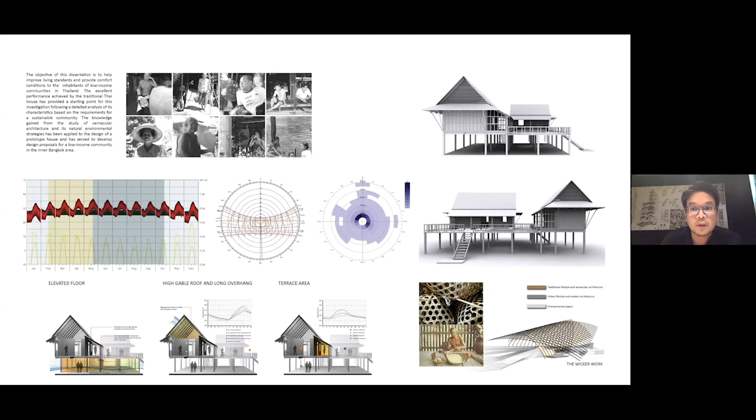So my dissertation is about the low-income community in Bangkok. And through the design process, I have learned the traditional Thai house, the climate condition of Thailand, and the suitable passive design strategies, as well as the analyzing tools, which allow us to understand our design's building performance. Essentially, I have learned the meaning of sustainable design and ways to apply this strategy to various conditions.

And after I graduated from AA in 2010, I came back to Thailand to set up my own office called Stu/D/O Architects with my friend who graduated from MIT Urban Design. And the meaning of Stu/D/O Architects came from the names of the 2 partners. And we also believe that collaboration and brainstorming, like the way we work in studio among friends and professors, will encourage our imagination to create good architecture.

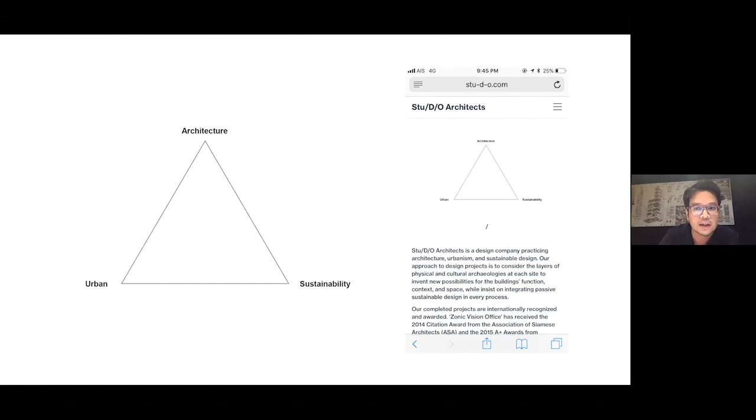And if you visit our website, you will see that our aim is to merge the idea of urban and environmental design into our architecture. And right now we have about 17 people in our team. And our office is an open plan in order to encourage teamwork and provide flexibility for the employees for the highest level of productivity.

And at that time, the idea of sustainability in Thailand was still not that widespread. A lot of people may have heard it as a buzzword, but they didn't really understand enough and weren't willing to invest in sustainable architecture. So they rarely invest in environmental consultants or in environmentally friendly materials, except for a small number of projects that are specifically aiming for the LEED certificate. So we had to absorb and manage the expense and man-hours, as there wasn't enough flexibility from the client side to compensate both the duration and professional fee of the design.

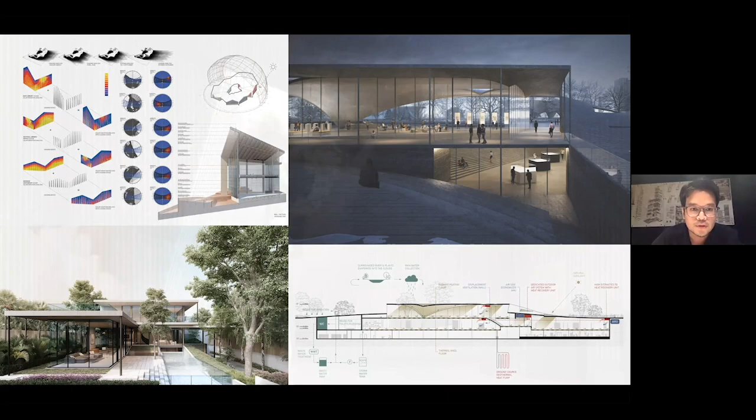And within these conditions, we try our best to propose environmental passive design strategies for every project we have done, while still maintaining both the function and aesthetic of architecture. And this became the main approach for our design that distinguishes our projects from other firms in Thailand. And our design philosophy is to use architecture as a medium to connect between people and environment, accentuating its identity through architecture and space that enhance user comfort, as well as benefiting society and environment.

So the first project I want to show you today is called Zonic Vision, which was our office's first project. It's a 2,000 square meter, 5-story office building. And by the time I was back in Thailand, the project massing and function had already been developed. So I stepped in to help with the front facade, which needs both aesthetic and thermal control as it faces west. So we proposed a double skin system with ventilation to reduce heat gain and at the same time provide aesthetic through glass with various opacity. And it also responds to the function inside and creates patterns which relate back to our concept of sound frequency.

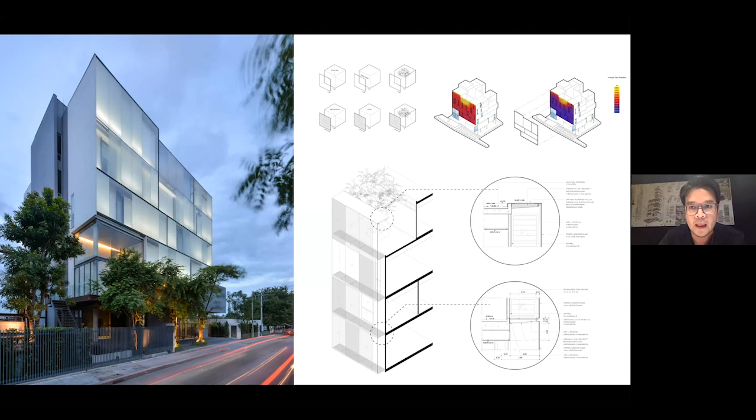So then the next project is Konapa, which means in the forest in Thai. It is a mixed-use project that reminds me of what Simos was saying, that sometimes our own feelings tell us about the environment more than the simulation itself. And during the design process, we were lucky to have known the owner of the project and were able to visit the site almost every week, which allowed us to deeply understand the site condition and environment.

And this project is located near Phrakanong BTS train station. So the foot traffic here is quite high because people normally use this street as a shortcut to the BTS. And the existing trees provide cooling shade for this street, which is usually very hard to find in Bangkok. However, the fence is in the way and prevents people from having access to this green area. So we wanted to preserve this hard to find green area in the city while making it more accessible.

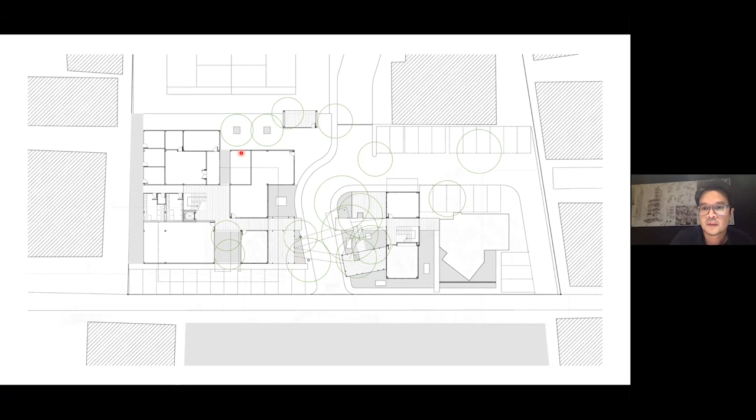So we came up with the idea to merge architecture into nature and emphasize the uniqueness of the atmosphere that nature provides. We started by surveying the existing trees in order to find the best location to place our building. As you can see, most of the existing trees are in the middle of the site. The complex is therefore divided into 2 parts, with the advice from the arborist that a higher building may block the sunlight to the pink trumpet tree here.

Building A was then designed as a horizontal building, while building B is a vertical building. And in the middle, we create a floating exhibition space that is connected to bridges, stairs, and a ramp. And as you can see, we try to open up the middle of the site, which has a lot of trees, for the main entrance.

The components of the main facade, which faces the street, create a gradient pattern from the trees in the middle toward the urban context. And because of the good microclimate condition in the site, this side of the facade is the only concern we have on solar radiation. Therefore, we have decided to make it a double skin facade with openings to help ventilate and block the direct solar radiation for the interior space.

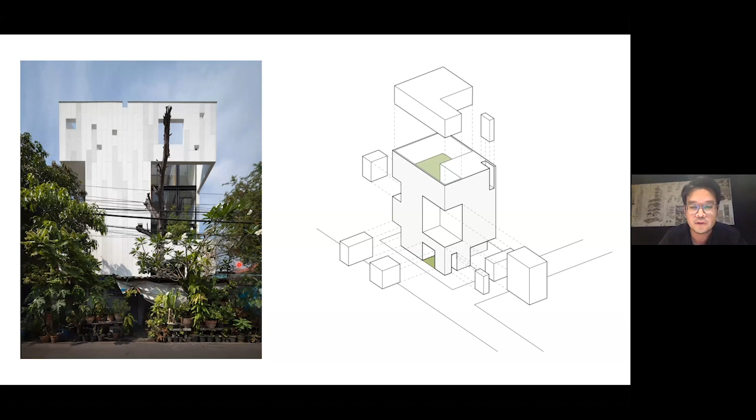We then subtract certain parts of the massing in order to create internal green areas. And our strategy in puncturing the openings can be categorized into two ideas. The bigger openings are used to frame the view, while the smaller ones help with ventilation. Other details such as tapering the edge will help with privacy and create interesting light and shadow inside the house.

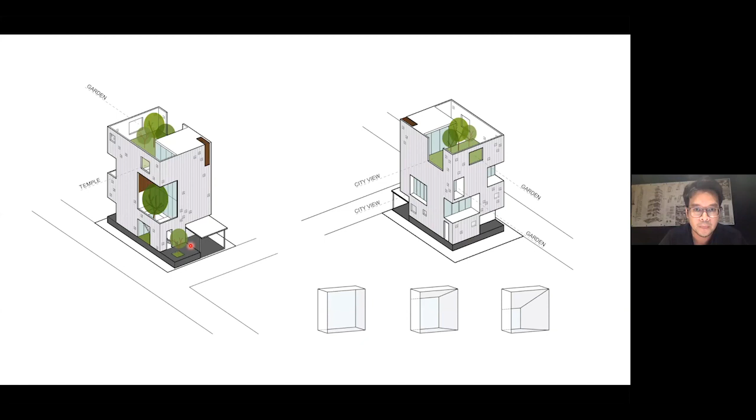And the exterior wall consists of two concrete layers with insulation in the middle to help reduce the heat. We also use wood louvers which can be opened and closed wherever necessary in order to help block the sun and make the house feel homier with the warmer tone from the wood. And this tapered detail of the opening would help with privacy from the surroundings as well.

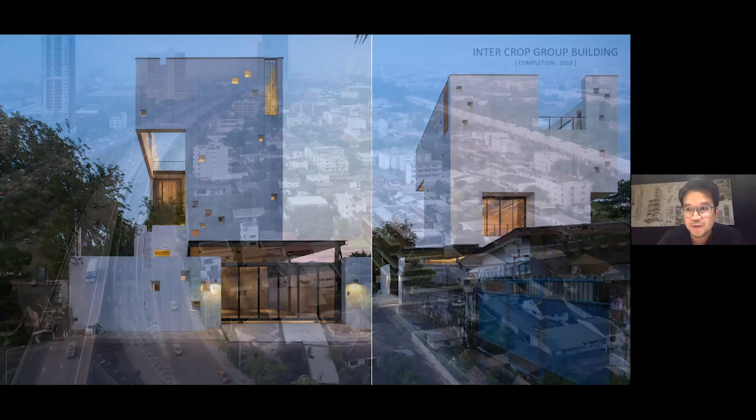And the last project I want to present today is the office building. The project began when we were approached to design the new headquarters for an agrochemical company by the name of Intercrop. And as the company name suggests, Intercrop's main focus is on the development and production of agriculture-related products.

So we wanted to rethink what a modern office building in the city can look like and how we can not only bring this modern trend into a traditional office setting, but also bring the feeling of working on the ground and in nature to our vertical building typology. So for us, using the rice terrace as an inspiration represents a way to reintroduce the traditional relationship between human work and nature, where all elements positively affect one another, into modern offices.

Ultimately, our goal is to design an office building that represents Intercrop and its relationship with Thailand's agriculture, as well as create architectural space that has a positive impact on its occupants and the surrounding environment. And because this project is located in a rapid urban development area, it became one of the first mid-rise buildings among the existing residential homes. And this condition led us to set up a challenge of how do we design a 5,000 square meter office building that is suitable to the surrounding context.

One of our design solutions is to reduce the scale and perception of the building's physical massing through the shifting of individual form masses, which reflects back to our rice terrace concept. And through the integration of as much greenery as possible back into the architecture, we were able to contribute more green area back into the city, which reduces the impact of the urban heat island.

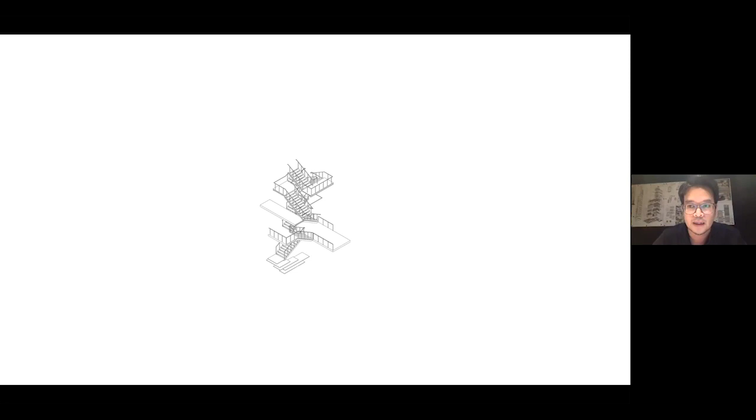And the formal interpretation of the rice terrace is also reflected in the interior space through the shifting platforms and orientation of each function, with the main staircase connecting them. And we propose these public functions as spaces that would encourage the office workers to be involved in a variety of activities and relaxation, such as fitness, cafeteria, yoga, and so on, which are all connected to the green terrace.

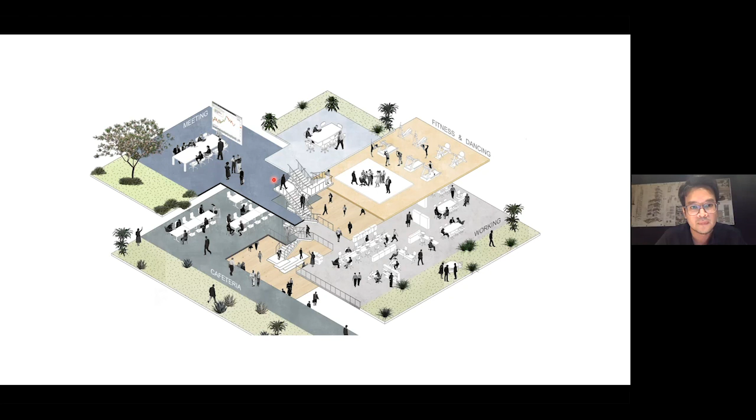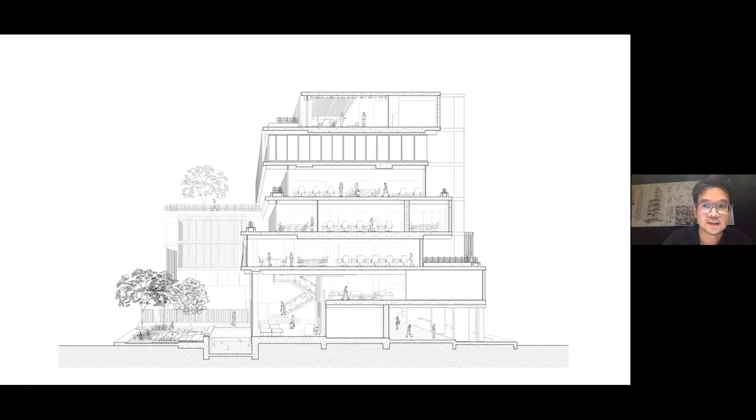And we try to integrate passive design strategies in order to create comfortable working space through the consideration of natural ventilation and adequate daylighting. Okay. And we also use a layer of green roof to act as insulation, and analyze solar radiation in order to design shading devices for each orientation, which were designed to reduce heat without compromising the outward visual connection.

We're using a tapered design for the louvers and reduce the thickness of the lower part of each louver to correspond with the occupants' line of sight. And the overall thickness of the louver also corresponds to the orientation it faces. The awning and upper louvers of the north facade protect against high angle sunlight, while the thick louvers are utilized in the south and east facades.

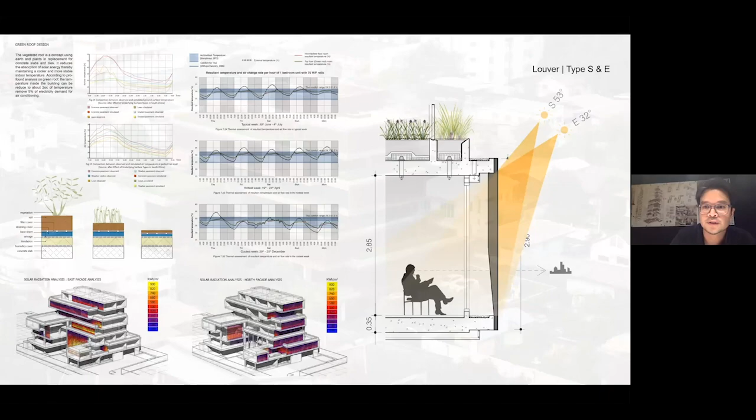And we were lucky enough to be awarded ever since our very first project, both locally and internationally. In our country, we received an award from the Association of Siamese Architects, which is the highest prize here in Thailand. And internationally, we have received the award from Architizer and ARCASIA. And also we have been chosen to compete in the World Architecture Festival in 2017 and 2018, which has taught us a lot in terms of presenting against world-class architects.

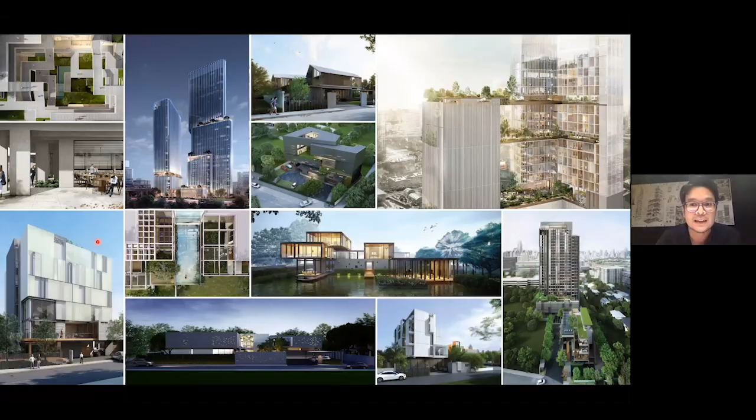And these are my 10 years experience after I graduated from SED. Finally, I would like to say that I'm very honored and proud to have learned from Simos and other professors, as well as meeting all my classmates. It was a great experience, and the knowledge I have learned from SED is an important part of my career and my success. I'm hoping that in the future, I will be able to create my own sustainable department in my office and integrate more profound understanding about sustainability into my architecture. And thank you.

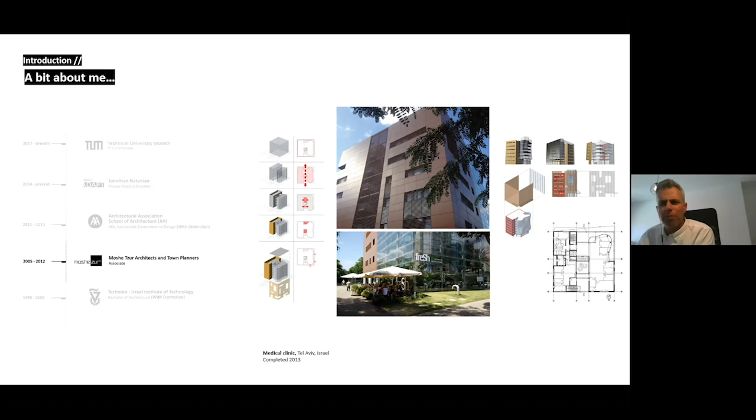The first one was a medical clinic, and the second one was an office tower. Although some environmental ideas were implemented in both, I already knew that I wanted to intensify my knowledge on environmental design, and getting the okay and the bursary from Simos and the staff helped my decision to move to London with my wife and one child at that time.

Looking back, I can say that the intense SED program converted the way I was, and still am, looking at buildings and sensing them. I really admire the triangle of knowledge between empirical measurements, simulations, predictions, and theoretical knowledge. This is something meaningful that I took with me and I'm implementing in a way.

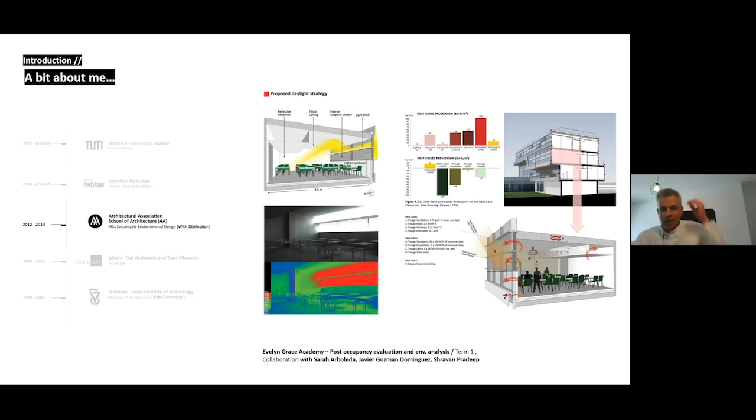Here we see a study my group did on the Evelyn Grace Academy by Zaha, which got a BREEAM outstanding, but revealed very surprising findings. Actually, SHRAVAN, the next speaker, was an important partner here.

This was our second project, in which we explored the interaction between environmental design principles and spatial expression in a colleague community in Brixton.

In my thesis, I came back to the office building typology in Tel Aviv, which I had worked on previously in practice, and developed an environmental design strategy for the adaptation of that typology to the local climate. Actually, this project raises a lot of interest now with the pandemic. So the idea that we can think differently about an office building, other than the default setting of the fully glazed office box, is something very relevant, I would say—still, fortunately and unfortunately.

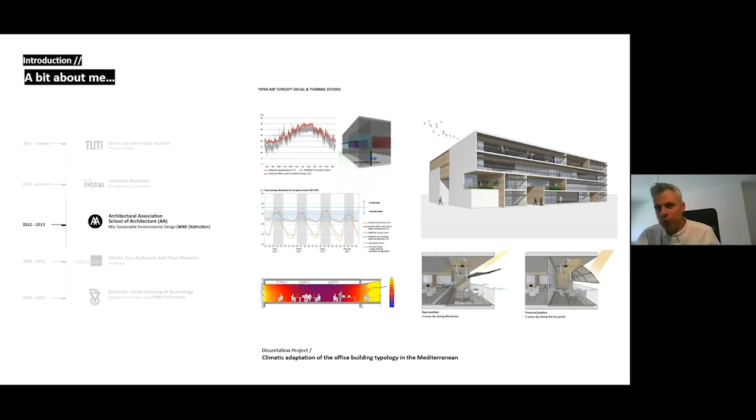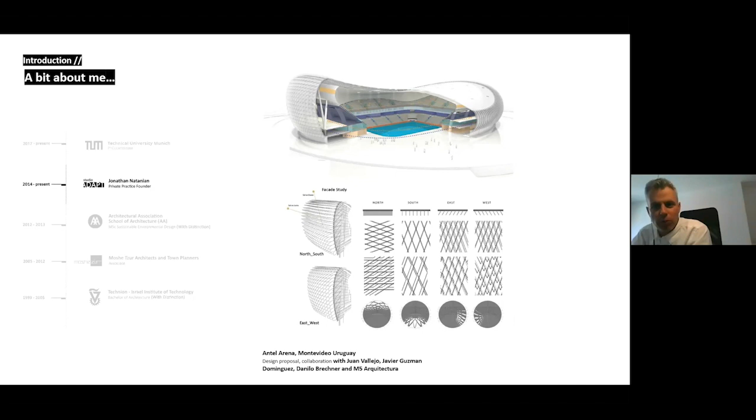Post-graduation, I came immediately to Israel and founded Studio Adapt, which is a sort of hub under which I led research, taught, designed, and consulted, both abroad and in some projects also in Tel Aviv.

At that time, I led research for the Israeli Ministry of Environmental Protection. I won a grant to adapt the whole theme of zero energy buildings to the Israeli context. While doing that, I realized how limited the valuable knowledge is on the correlation between urban and building morphology and environmental performance in our context, but not just there. That sparked the idea to do a PhD.

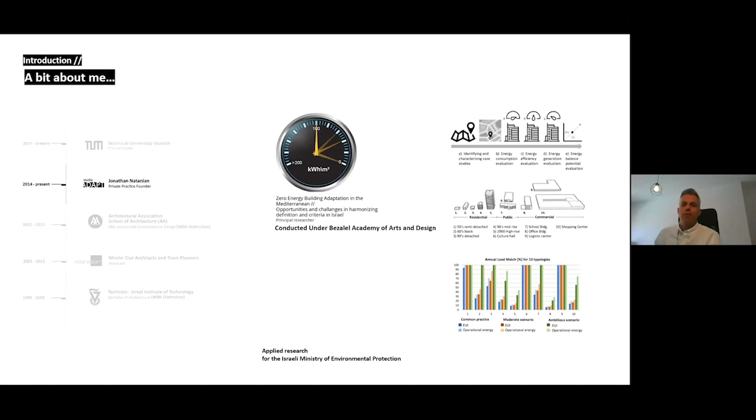After winning the full scholarship from the DAAD, we moved to Munich in 2017, now with two kids—they are now 5 and 10, two boys—to explore new workflows to indicate the spatial environmental trade-offs of densifying urban blocks in hot climates.

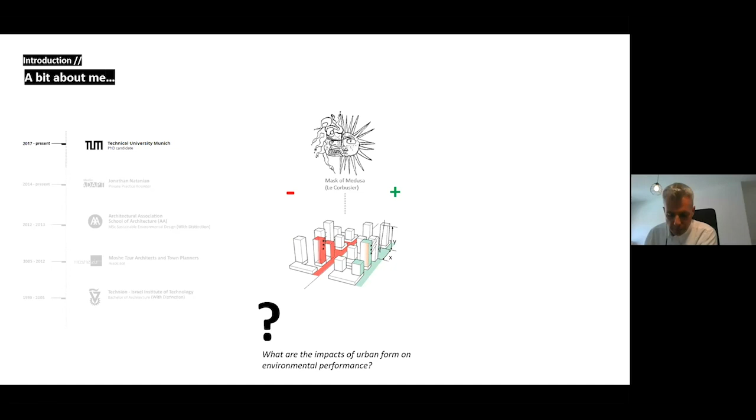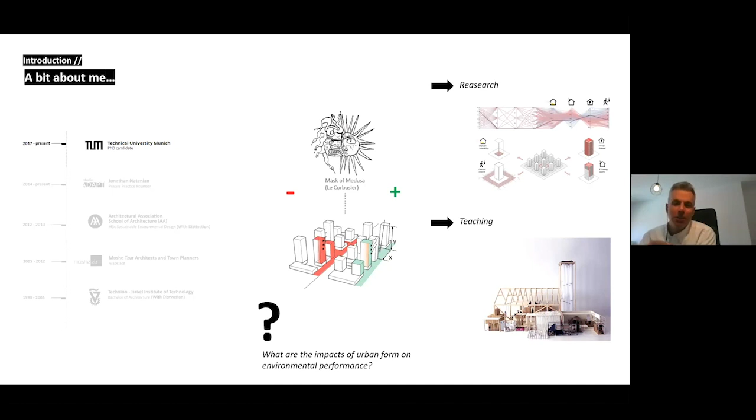During my four years at the Technical University of Munich, TUM, I was mainly focused on research and teaching, so it was very far from practice. But I must say I really loved doing that, and it led me to the tenure track position that I'm going to start in September in Israel.

In my work, I am exploring an integration that I claim is not yet very well established between architectural thinking, which is preoccupied with these sort of questions, and environmental engineering, which looks at the built environment from a different perspective. A gap still exists despite recent developments in design platforms, BIM, etc.

When we translate them into quantitative discussion, on the environmental side we're witnessing initiatives towards zero emissions and zero energy. On the urban side, the paradox of the compact city is still relevant: on the one hand, the advantages in terms of infrastructure reduction, lower envelope area, walkability, social connectivity; versus the disadvantages, urban heat island, reduced access to light and air, social segregation, etc.

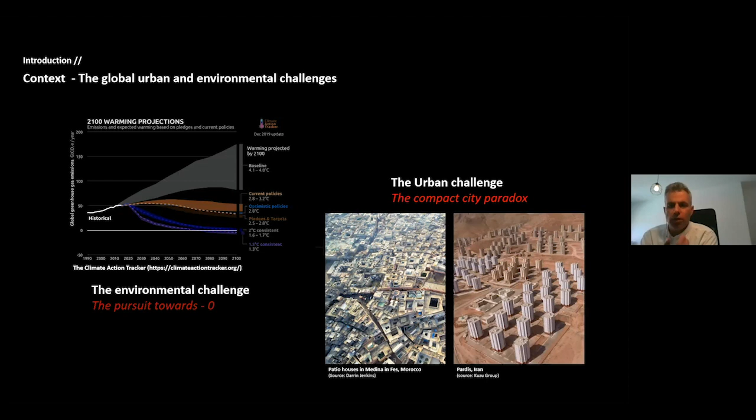This discussion is also expressed on a smaller scale, from a typological point of view. The same density can be achieved in several ways, and the discussion shifts from high density to better density, with each typology giving advantages and disadvantages which are important to discuss in different contexts.

Coming to a more localized context, in my dissertation at the AA, and in my PhD, I came back to Israel, which is a very interesting place in terms of context. This small spot on the map can be read as hanging between European Mediterranean, looking west, and Middle Eastern, looking east. This combination creates a very unique situation.

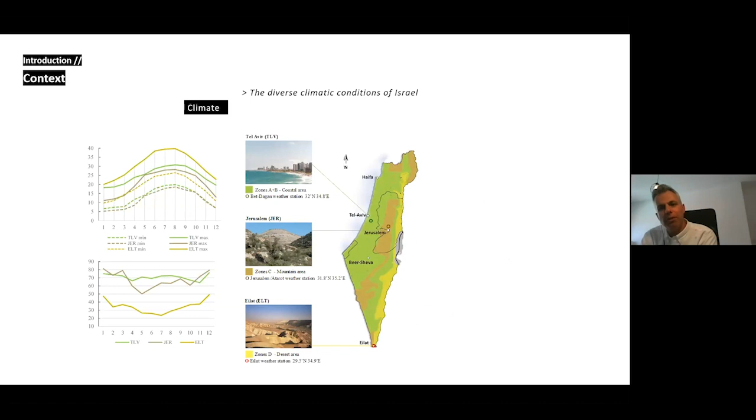Climatically, there is a rather unique variety here, from coastal to mountain and desert climates, which unfortunately does not always receive proper planning attention.

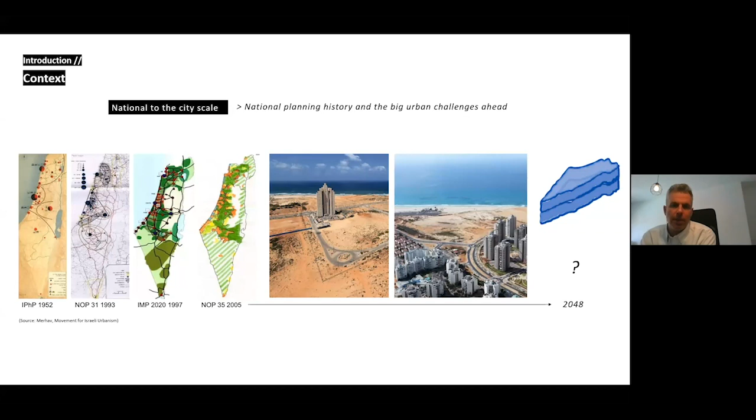Nationally, Israel is already heavily urbanized, above 90%, but it's facing a huge demographic challenge. It's actually expected to double its built environment during the next 30 years.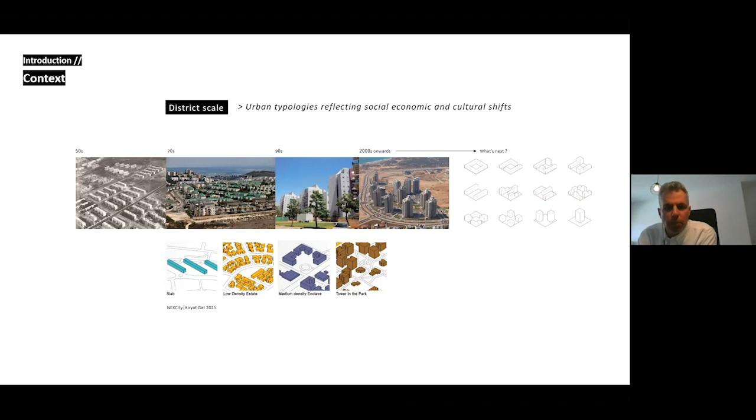Morphologically, the Israeli city is a typological mosaic. There's a lot of construction going on, but today most of the new construction follows the controversial non-urban model of the tower in the park typology. Indicators are needed to inform designers and policymakers how this should be done, also considering new environmental goals such as zero energy.

And that's where I fit in. Under the overarching theme of the correlation between urban and building morphology and environmental performance, I started asking different questions. The first was regarding the contrasting impact of the sun, which cannot be avoided, as Le Corbusier drew nicely.

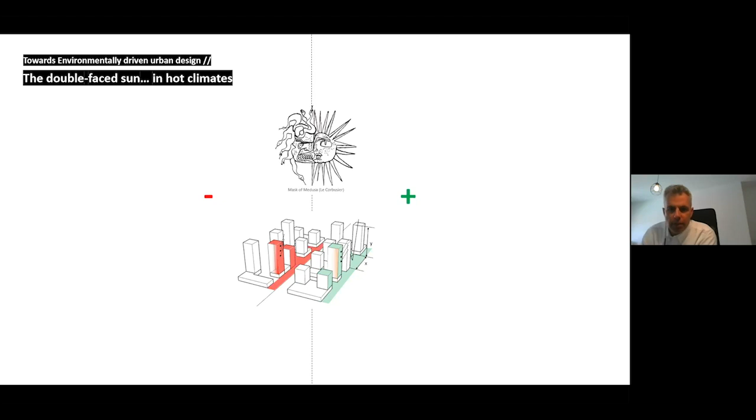On the one hand, we want to spread out buildings to allow for passive heating, energy production, and daylight. On the other hand, we want to increase self-shading to block undesirable solar gains, reduce glare, and increase density. So how can we reach an improved urban solar trade-off in a dense fabric? That was one of my first questions.

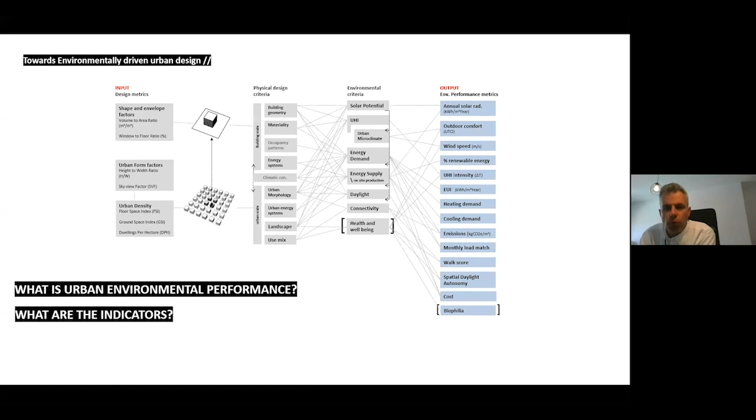Next, I started mapping the criteria for environmental performance, the indicators with which we quantify that performance, and the methods and tools which investigate the correlation between form and environmental performance. At that point, I asked a question I had long before starting my PhD: which typology will yield the best environmental performance, and how far can we densify without compromising it?

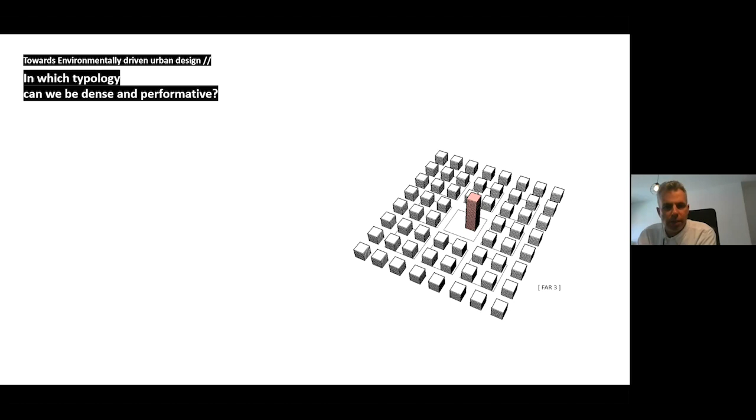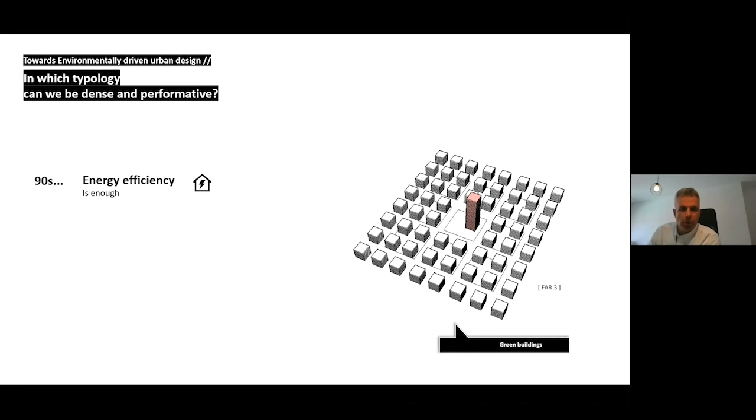There is an evolution of the reference point, from focusing on energy efficiency only—unfortunately the Israeli Green Building Code stops somewhere here—to energy balance between demand and supply, when the world is already talking about regeneration, where enhancement of the environment starts to be the name of the game.

It's also reflected in the wide range of SDGs, where energy is considered together with other indicators. From a deep understanding of the local context, I knew how far we are from achieving high environmental performance in the Israeli built environment.

We are far from fulfilling our solar potential and from matching energy supply and demand. On the environmental quality side, only small consideration is given to the thermal comfort of the man on the street or the visual quality in buildings. Clearly, the morphological parameters of building designs directly influence all of the above.

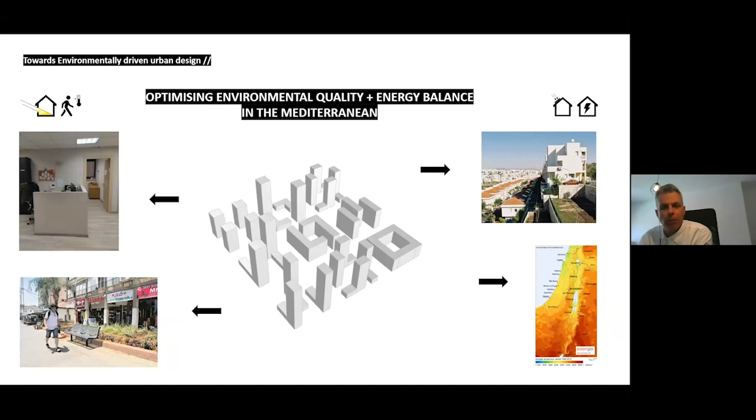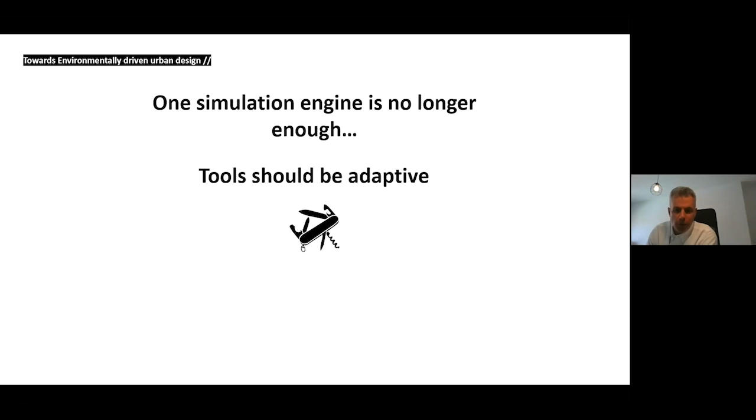Helping change that was a strong motivation for me, a mission, if you will. Thinking about it, I also immediately realized that in urban environmental evaluation, one tool might not be enough, but also that there are a lot of tools out there. So the effective integration of tools to find the best trade-offs between environmental considerations quickly became my focus.

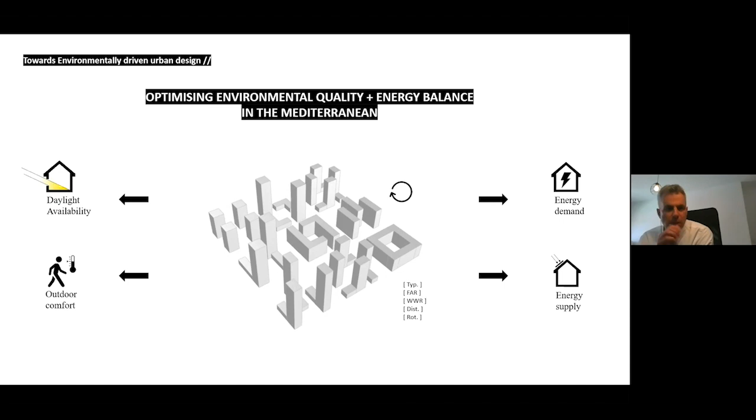From delving into the state of the art and understanding the local context, the aim of my PhD study emerged: establishing a parametric workflow to deliver reliable indication for several environmental performance metrics towards an improved performance starting point. In my research, I decided to focus on four criteria, which express the balance between energy considerations and environmental quality.

From that point, my methodology quickly emerged, and the analytical parametric workflow was set in Grasshopper, in which each design input or geometrical component, as we see on the figure, is automatically channeled to different environmental calculation modules. This is how it works under the hood.

Relevant data is seamlessly and selectively channeled to validated simulation engines. The outputs are managed and calculated according to selected metrics, and the results are then visualized for comparison or used for optimization. This workflow can be easily adapted to include more KPIs, other scales, etc.

In that way, a large set of results is gathered for various design alternatives, and the results can be visually analyzed to select the best combination in terms of evaluating several environmental criteria together.

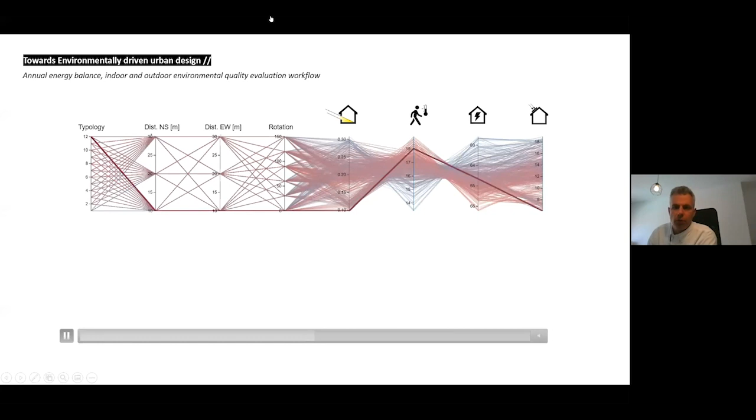So my research moved modularly. Each segment added another aspect or environmental criteria. It was published separately—this was a publication-based dissertation. The fifth one was not included, but it closes the loop with optimization.

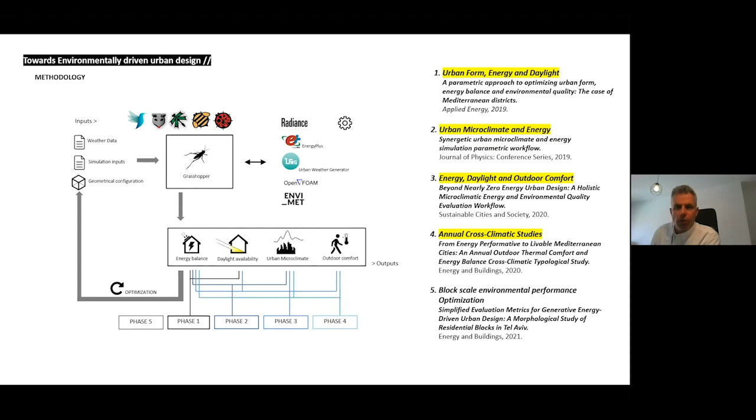I now very quickly go over these phases just to show you the idea.

The first segment focused on 5 typical typologies in Israel and tested the impact of both building scale and urban scale design parameters on both energy balance and daylight performance. The graphs we see here actually tell us for the first time in the context of Tel Aviv how far we are from achieving zero energy in different density and typology scenarios. So it's actually very useful.

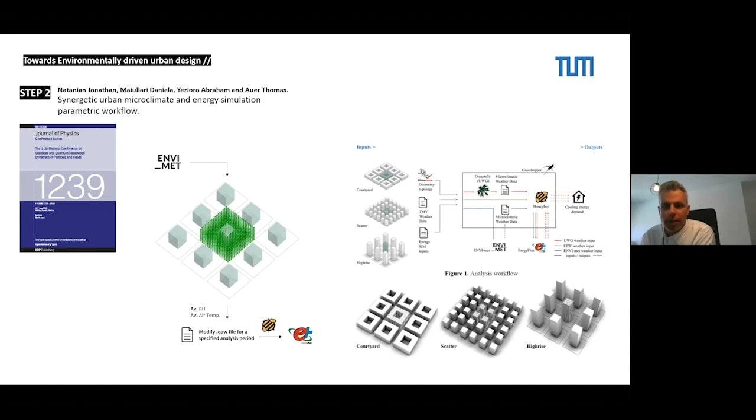The second segment tests the opportunity to use microclimatic outputs gathered around a building to create a new weather file for the energy simulation, including microclimatic weather data in energy simulation workflows, which were tested here for 3 typologies.

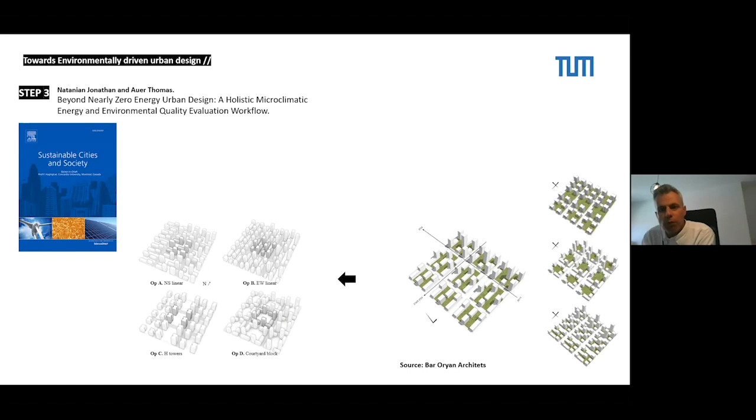The third segment looked at an actual case study in Tel Aviv, in which the architects were looking at 4 different typologies intuitively for a very large district. They said the wind might come from here, the sun could come from here, maybe this one is better than the other. So I took these 4 typologies and used my workflow to indicate which would be favorable and in which configurations, taking also outdoor thermal comfort into consideration alongside daylight and energy balance.

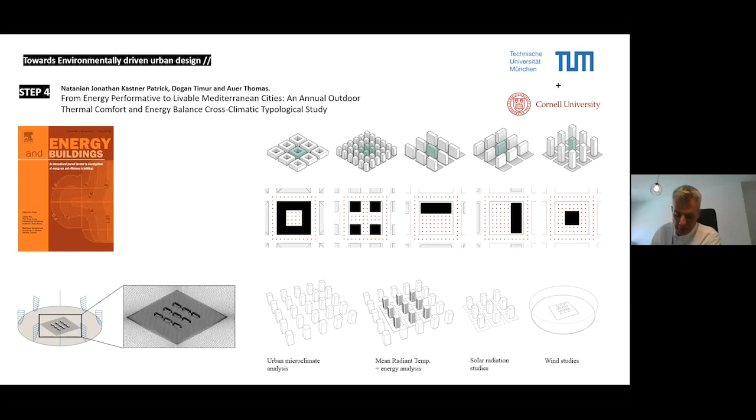The fourth segment of my research was done in collaboration with Cornell. They created this great cylindrical analytical tool, Eddy3D, that lets you simulate wind patterns on an annual scale using OpenFOAM. This allows us to start analyzing the annual outdoor thermal comfort, which we did not do until that innovation. I did it here with them for the same 5 typologies. So for the first time, we can get these annual outdoor thermal comfort plots for different typologies, and in this case also compare different climates towards a more localized typological decision making.

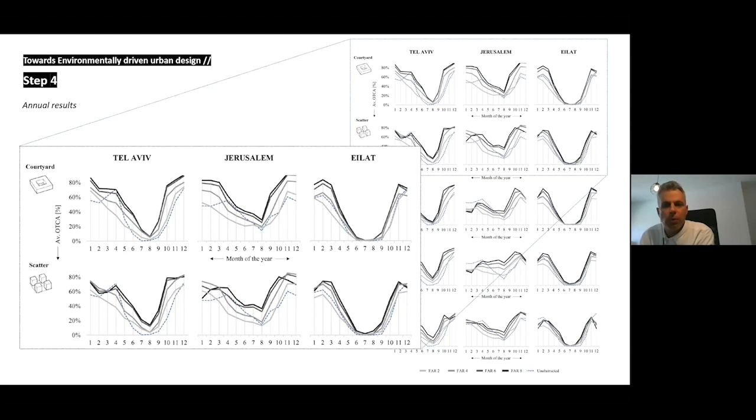The last segment I'm going to show you, I know it's a lot of numbers and graphs compared to the very nice images we've seen before, is about the integration of optimization into my workflow. It's an ongoing collaboration with Dr. Thomas Wortmann, who created the Opossum optimization plugin for Grasshopper from Stuttgart. In this study, I upscaled my workflow to 12 typologies and a larger district.

At this scale, if you look at the combinations, the number of design alternatives is too overwhelming to be calculated with parametric methods—it will take forever. So in this study, we highlighted simplified metrics which can be used for rapid optimization of larger districts.

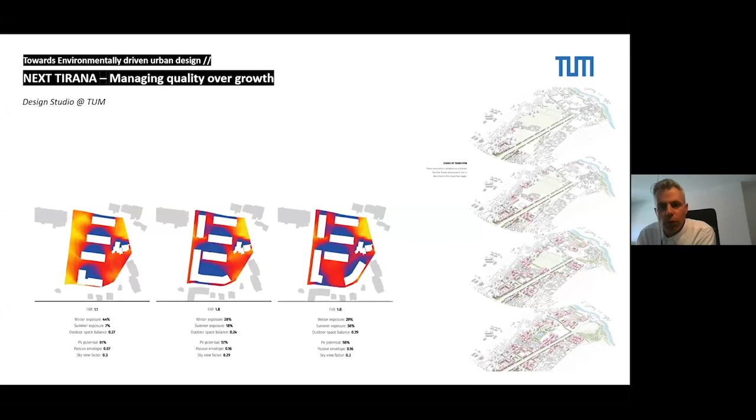I already had the chance to test this workflow in teaching, such as in the studio we gave on Tirana as part of my work at TUM. This is an urban setting with a huge development contrast between shiny architecture and deprived areas, undergoing massive development and redevelopment that requires thinking. With some of the projects, my workflow could help inform the strategies. It was really insightful.

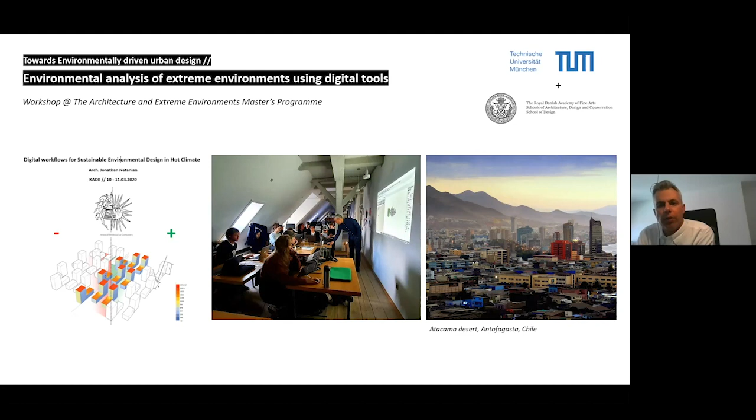Right before Corona, I had another opportunity to visit Copenhagen and run parts of my workflow at KADK in the Masters of Architecture and Extreme Environments program. We actually won a grant based also on this workshop, for an idea with Aimee Desert, who works for BIG, focusing on annual environmental design.

Data visualization—we are working on a new plugin, which will be open source, that will help provide a new reading of the data in different spatial and temporal ways. We are accumulating all these layers of data; we need to start curating them somehow.

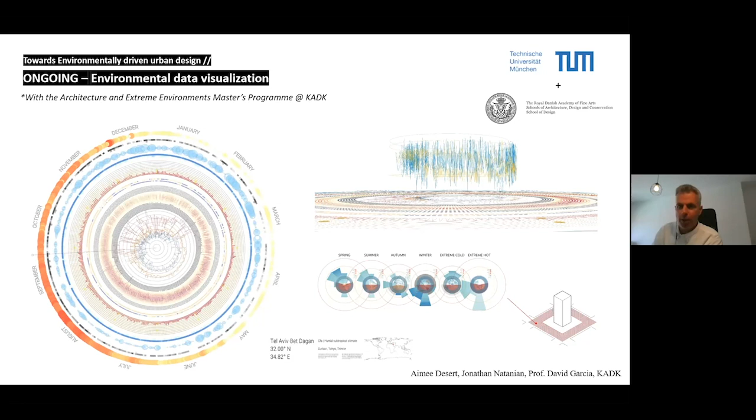Looking forward, I will briefly show some ideas which are currently cooking. I would say the research paths forward are mostly driven from the limitations I encountered in my PhD. Integrating vegetation is a very important step forward, and validating my workflow—especially the MRT calculation—has substantial limitations I aim to work on. The adaptive, open-ended nature of Grasshopper allows for many new directions and additions to my workflow, such as LCA, mobility, and more KPIs.

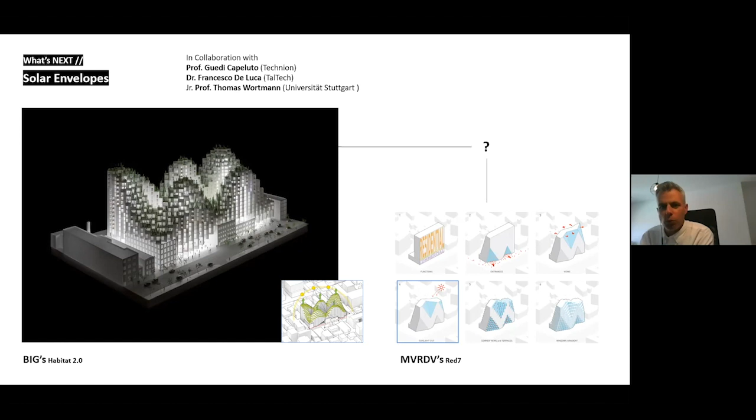So I will now very briefly introduce one ongoing research direction I'm currently working on together with Professor Guedi Capeluto from the Technion, Dr. Francesco De Luca, and Professor Thomas Wortmann. We are developing an application of my workflow for solar envelopes. We see these cool pixelated designs which claim to work with the sun, more and more, also at the urban scale. But I always felt that more science should come into these ideas.

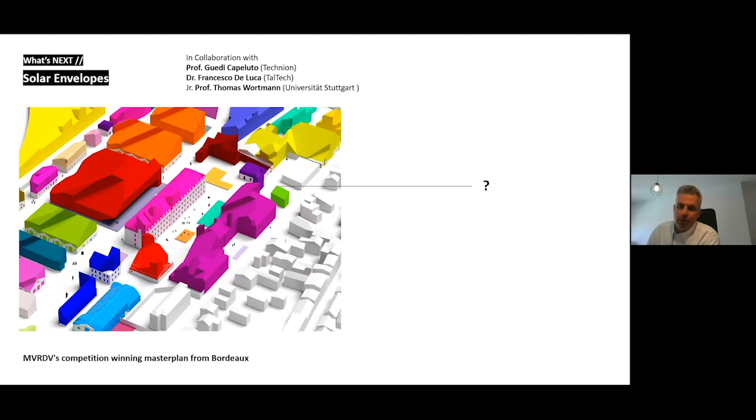So we offer this bottom-up approach for solar envelopes based on an additive voxelization method, by which we create multiple solar-driven massing alternatives, which are generated and analyzed using a series of simplified metrics I have previously developed, and then we can screen them using an optimization workflow or using visual optimization, as you see.

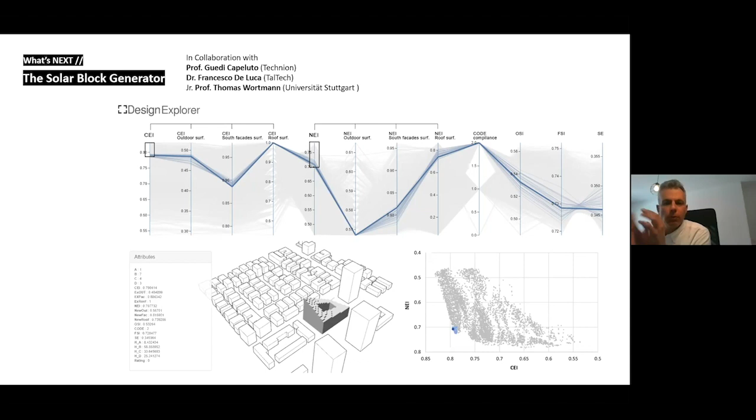So in contrast to the rigid solar envelopes, which sort of show us the maximum potential that we know, we have a variety of solar-driven design solutions which represent different trade-offs between different considerations associated with solar exposure and shading, which we then can choose from.

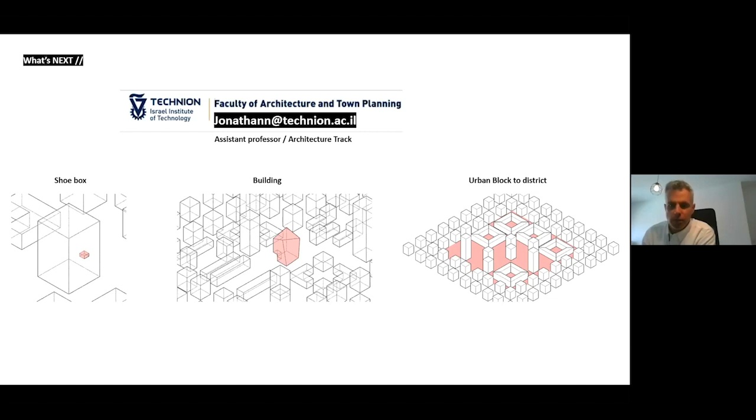And to conclude, although I focused here mostly on the urban scale, it's hard to separate it from the other scales, and the synergy between them is extremely important, also to achieve reliable and meaningful results. In my new lab at the Technion, I will probably create an extension to my ongoing quest to integrate environmental performance into architectural design in a cross-scale and cross-contextual way. So I hope you stay tuned.

And that brings me back to the dialogue between the architect and the engineer. If we ask what's cool, we get different answers, and although smart and artificial are becoming part of what we do, human intuition and touch are here to stay. And I really admire the attitude and approach of Simos to make us all environmental design Jedi warriors, sensing things. But I still think we have to think about the link between these two guys. So hopefully we can do something together on that.

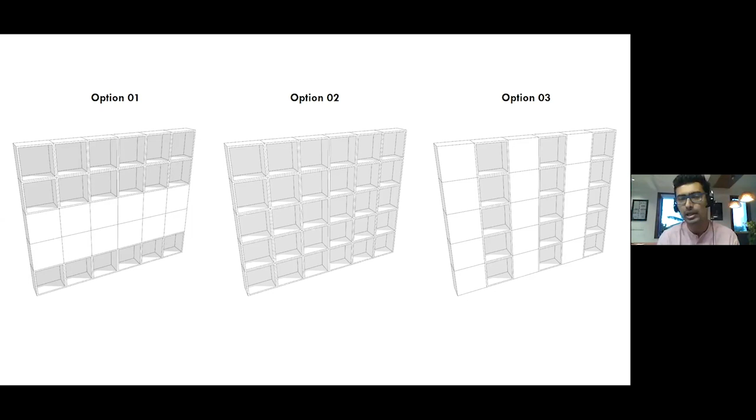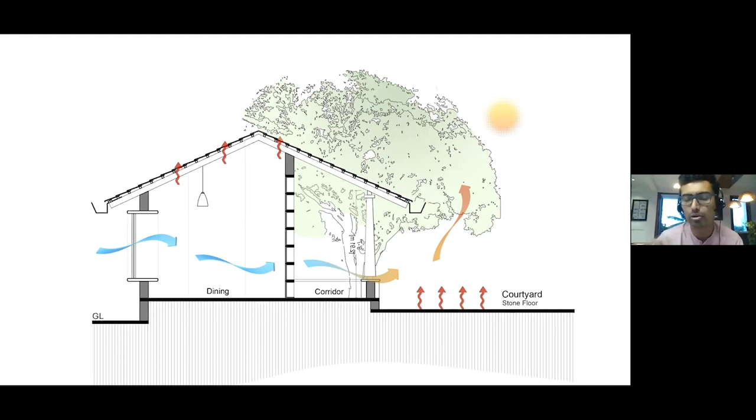But what was interesting is the use of these sinks as main structural elements, which means that the whole roof was placed on top of these sinks. It came about something like this, where you have your superstructure, which is sitting on top of these humble stone sinks. What was interesting is, and I would like to thank the client, because this is probably the first time they were put together like this as building elements. The clients, who were good friends of ours also, gave us the confidence to push this through as an idea and into execution.

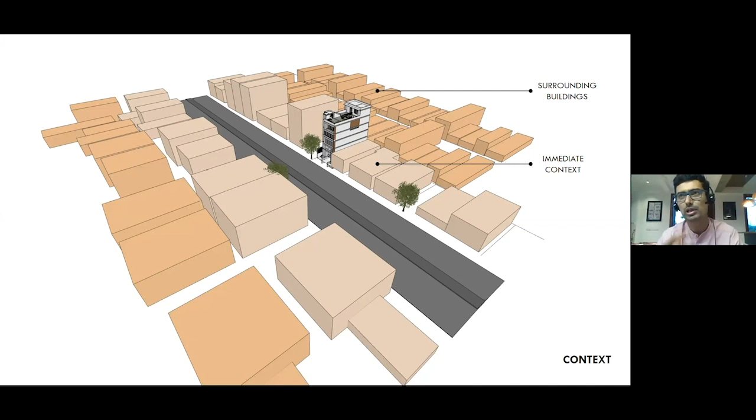So the office, it's a small site. It's a very small site. It's about 3,000 square feet, 300 square meter site in a very dense locality. We had a large road in front, a large road which in Bangalore also means a lot of traffic, a lot of noise, which meant that we could probably only get sunlight from that orientation, but not really bring in a lot of the dust and noise which accompany it.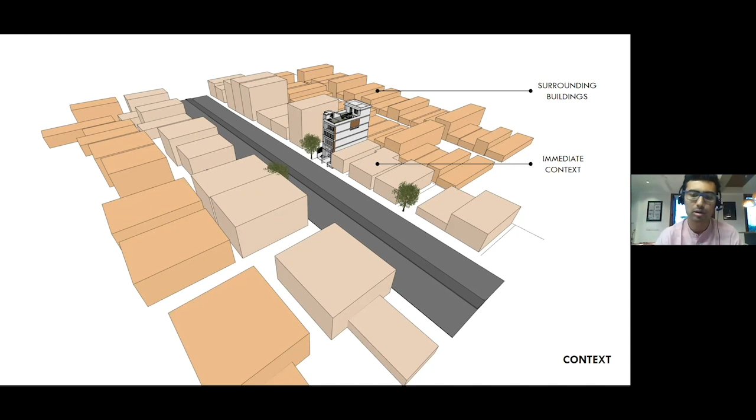So this is what we were permitted to build. In that we had segregated one part of it as commercial offices, and the top 2 floors were handed to us to build what we wanted to build. So I'll start off with what our office is. It's an open plan office. Right at the beginning is where all the public part happens, where you have clients, you have vendors coming in, and then far back is where you have the studio and our private spaces.

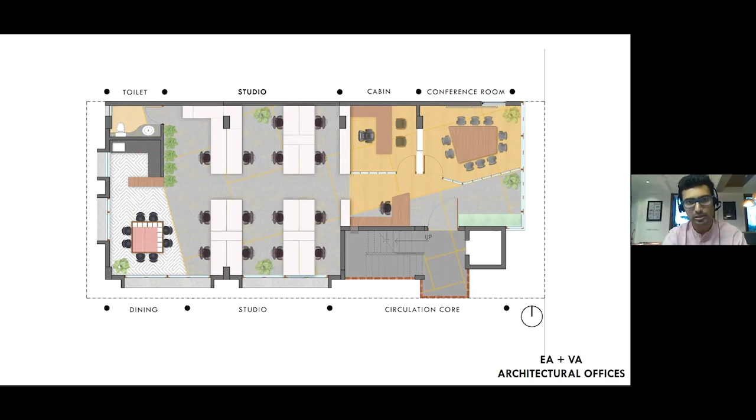We wanted to bring in a lot of light coming into the space. Like I explained before, we as a firm would like to experiment a lot with stained cement and stained concretes. So here you can see the use of green and grays as stained cement options. And of course, being in a tropical climate, we have a good amount of wood at our disposal. So we would love to use that as a material. So these 3 or 4 elements came together, defining our space.

So this is where I'm currently working out of. And we believe that we wanted to open out the complete environment and allow, as long as the windows are shaded and we had rain protection, I thought we were safe.

So one of the things that I think right after SED, one of the things that we picked on was we did not dwell a lot into analysis, and we did not go too much into numerical data, but we just believe that if you're able to keep these 3-4 checklists, as far as shading, as far as ventilation, as far as you're allowing night ventilation, as far as you're allowing cross ventilation, and you're bringing in a lot of light, reflected light, of course, you are fairly safe.

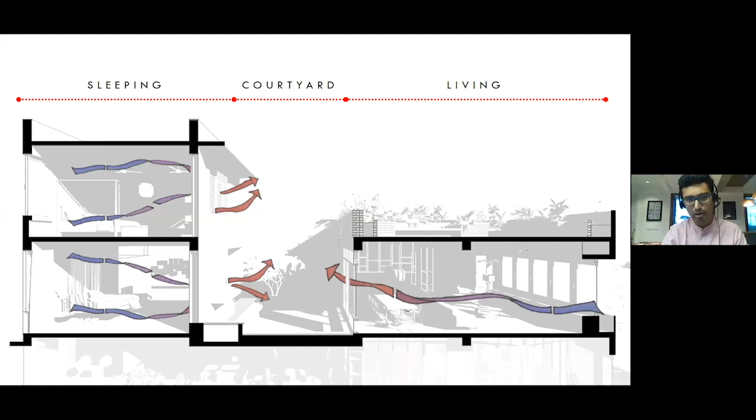In continuation with the same, we have the upper floor, which is the courtyard. So the idea here was very simple. We have divided the living, the courtyard, and the sleeping spaces. So that is what our initial sketches were, which then get reflected into this. So at the bottom of the section you see our office, and at the top you see the living and the dining room.

Right at the center there is the courtyard, and on the left hand side you have the 2 bedrooms that we've got for ourselves. So in some sense, the courtyard became the spine of the house. Everything revolved around the courtyard.

The living room, naturally, so like I was explaining earlier, we were abutting a major arterial road in Bangalore, which meant we couldn't open the windows, or rather we didn't want to open the windows there. We were getting a lot of light from there, but obviously all our ventilation, everything happened through the courtyard, which was secluded and isolated. Of course, this courtyard is open to sky.

So you see the dining, which flows onto the courtyard. You have the kitchen, which flows to the courtyard. You have the bedroom, which flows onto the courtyard. And then the courtyard became central to every activity of ours. Then you had the bedrooms on the top and a terrace for us to entertain.

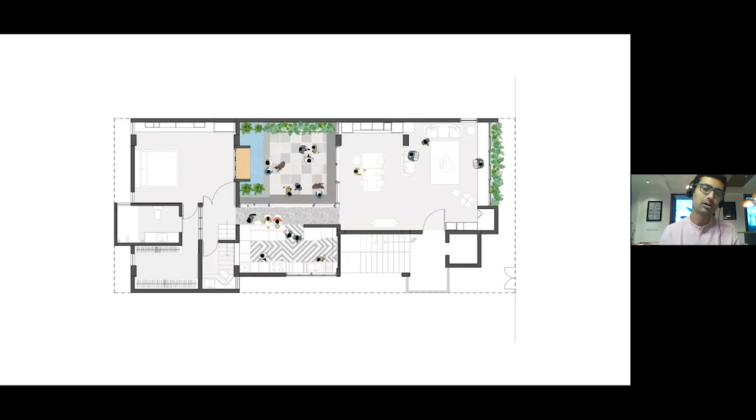So this is something which is showing how we would like to use the space, and we have been mapping how we have used the house, and in all our mapping activities we have realized that from every space, whether we have guests or don't have guests, or if we are just alone at home, the courtyard is something that always gets used.

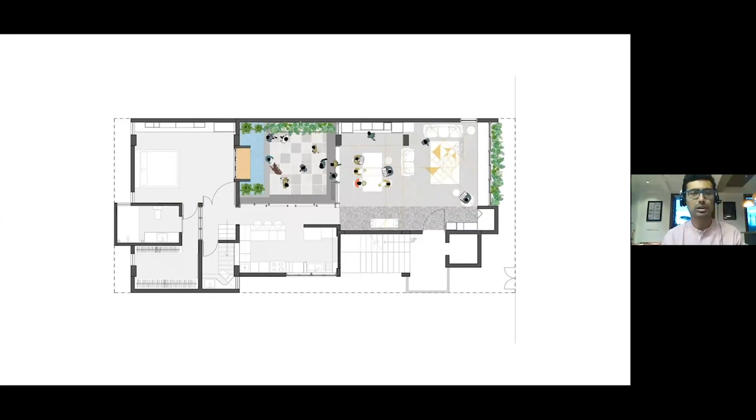I wouldn't want to, how do you say, put in a lot of technical details, but we have been doing some data analysis, or rather we have put in some data loggers to read what kind of temperature it's been, what are the temperature graphs and all of those. I haven't put this down in this presentation, but I would love to put those in detail and explain them sometime.

So this is how the courtyard starts to look. It has a water body which brings the ambient temperature down. This is the living room, and the living and the dining open out into the courtyard. Onto this side, you see the connection between the dining and the courtyard, and then the kitchen which flows onto the courtyard. A lot of light coming into the toilets, the bedroom on the top.

In all these, what you see is one consistent factor, that is just the use of 2 materials: we've used wood and we have used stained cement in different colors. That flows across the house, be it walls, be it flooring, it's all the same.

Onto the third project, and this is the project that we are currently executing. It's basically the idea of staying local and using... So the project is a farmhouse again. This is set about 100 kilometers from Bangalore.

The exciting part, or rather the challenge in the project, was the fact that the client wanted us to use bricks which are from a 50 kilometer radius, which meant that all the materials had to come in within this 50 kilometer radius. That was exciting because we figured that there was a brick kiln right next to our site. So we started testing bricks and we started using the same bricks. So if your question is where is the sustainability coming across, it's basically we're trying to build local.

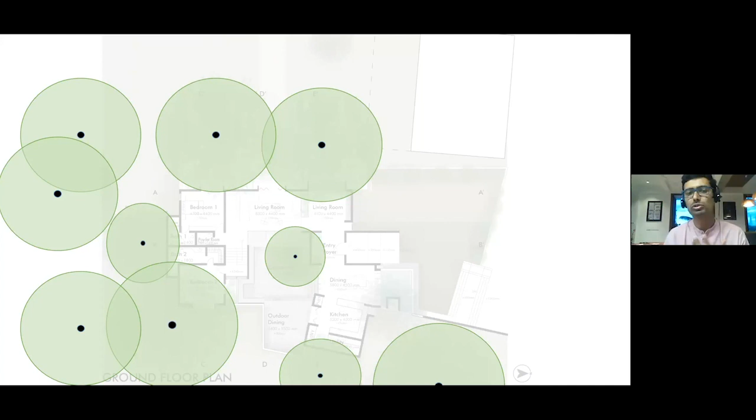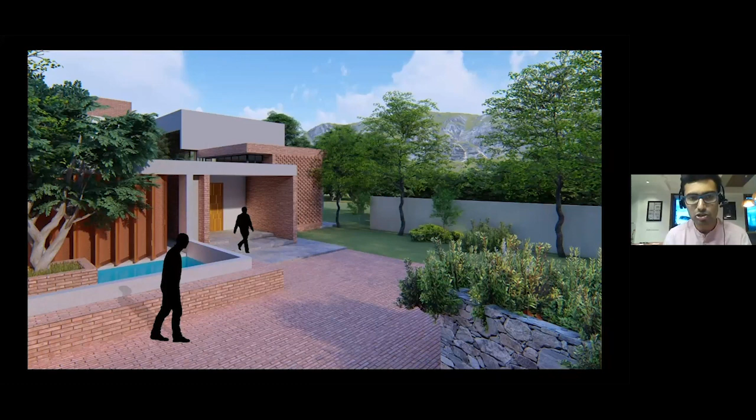So the challenge was that this was in a mango orchard. This site was given to us, and we had to snuggle this house in between these mango trees. And quite naturally, a courtyard developed in all of this. So that formed into using the bricks as a feature, using again wood and exposed concrete as the other elements that come in.

This is something that we are now working on, and hopefully in the next 1 year we should be able to finish this project. So the courtyard is something that all of us are looking forward to, because it's a double height courtyard, it's an open to sky courtyard, and we are now trying to study the effect of this courtyard in a larger setting. So this is a project that the office is looking forward to.

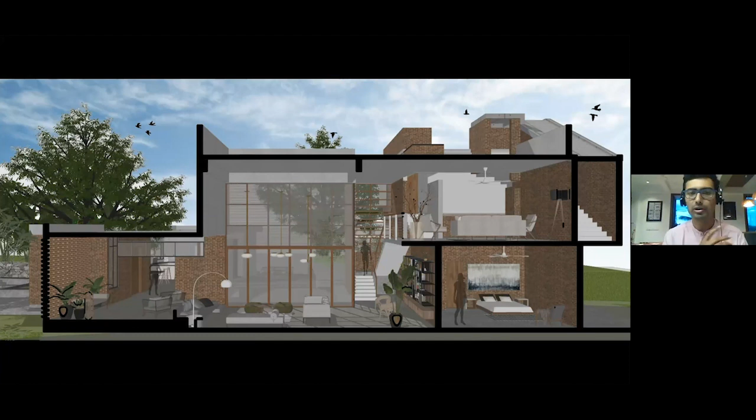This is basically a section through the project which shows the double height, and we're trying to work with volumes to figure out how do you integrate volume into the connection between the outside and the inside, trying to fuse that threshold and allowing transfer of heat or of air in a seamless manner, at the same time giving the occupants the privacy that they need.

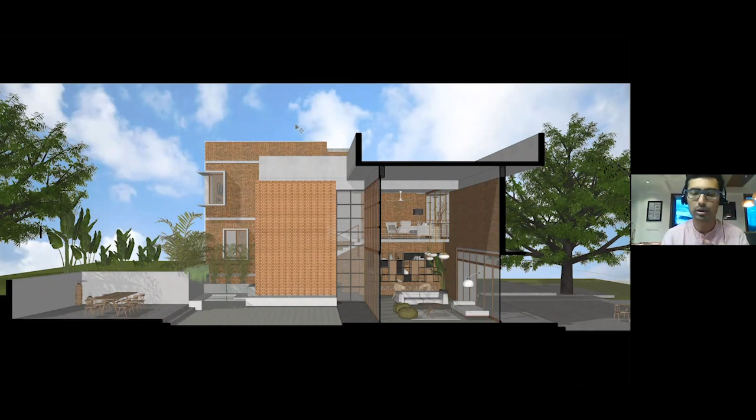So this is the section through the courtyard, and the previous one was a section through the longer part of the house. We're trying to do different types of bricks in the same project to figure how the whole thing is going to come about. And I think the reason I would like to bring the whole presentation together is actually in these 3 or 4 slides that I have coming up.

So for one of our projects, the client wanted us to use reclaimed materials, and that got a debate started in our office. We had been to one of these people who sell reclaimed wood, furniture, or materials, and the thing that struck us is houses in Chettinad, in the southern part of India. Houses in Chettinad were brought down, and every single component of that house was put for sale.

And that got us thinking, isn't this true sustainability, where you're talking about a house which was built over 100 years ago, it's brought down, and now it has new owners, which means that there's literally very less energy spent in putting it together, as opposed to everything being new. And that is something that we have tried to do in some of our projects.

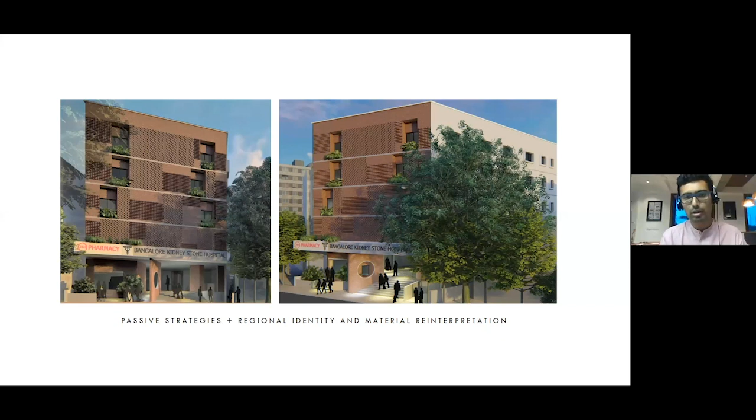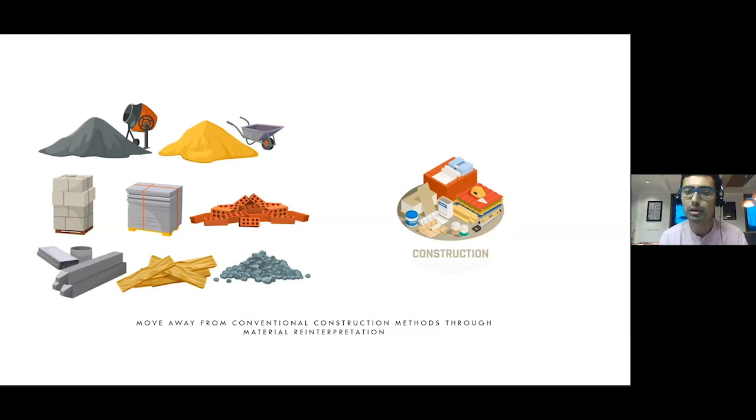And I think the last thing that I would like to talk about is we would like to move away from conventional construction methods through all these material reinterpretations that in a very small manner we have been trying to actively do. And hopefully in our small ways, we'll be able to reinterpret the whole term of sustainability in some sense. Yeah, thank you so much.

Thank you, Shravan. Thank you for very good projects and a very worthwhile synthesis between the original and the traditional.

And I think there is a very strong stream of research that you have embarked on, of reclaiming value from stuff that has been left out as useless, and making it useful, valuable, and bringing in its traditional value as well.

So now it would be nice to be able to have some discussion. I always say that, and then when I ask the audience in a meeting like this to engage in some discussion, it's really very difficult. And recently I said, well, I will no longer ask anybody to say anything, maybe even accept the silence that the medium somehow likes to create, and hope that somehow telepathically, people will engage.